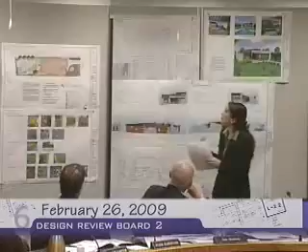As I indicated earlier, the project entails, in addition to the 1-story single-family house, taking part of the existing front house—195 square feet of it—and converting it to a garage, adding a new portion in front to have the garage located in the front. That new portion will be 293 square feet.

293 plus the 195 square feet gives you the total of the new garage, 488 square feet total. Now, as it relates to the addition of the actual habitable floor space, I'll break it down referring to my staff report. The addition of 849 square feet includes the construction of 754 square feet along the north side of the house, right in this area.

They're also constructing 95 square feet at the south side, and as I indicated earlier, they are proposing a small 83 square foot accessory building behind it. It's attached with a trellis, and attached to the trellis at the other end, closer to the north side, is an accessory structure—a bar slash little wet pool area next to the pool, like a barbecue, an open space. They also have the existing pool, which they are proposing to remodel.

I have put up the landscape plan because they are proposing to completely redo the landscape. One of the most distinctive features relating to the landscaping of this site is the oak tree located in the front yard, which is proposed to be preserved. It's a multi-trunk oak tree with a very large canopy, and our urban forestry staff has reviewed the project and is working with the applicant to make sure all mitigation measures are addressed during construction.

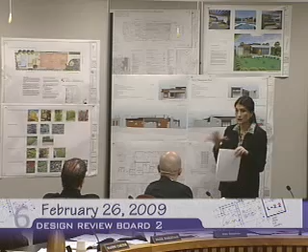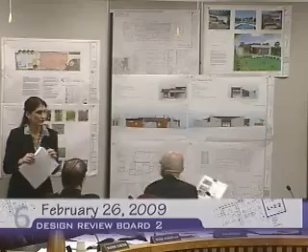I also wanted to note that the project does comply so far with all of the zoning requirements. Now I'd like to jump into the design. As you can tell by the photos, the existing house has a certain style, which is completely being changed and redesigned to a more modern style home. I go into detail in the report as to the types of materials they are proposing, which is consistent with this contemporary architecture. Are there any questions regarding any sections in the report before I jump to the staff analysis? Nope.

Staff recommends that the board approve the project as proposed because it is compatible with the design guidelines and the overall neighborhood context. Staff also recommends considering permeable paving, or a California driveway, for the new driveway rather than concrete.

I would like to mention, which I did not include in the staff report, that in the R1R zone, when you construct a new driveway, decorative paving is a requirement. Due to that, the applicant will not just be able to use a plain concrete driveway—it has to be decorative. I did not mention that in the report, but I addressed it earlier with the property owner, and he'll most likely bring that up as part of his presentation, and perhaps discuss with the board a different type of material for the driveway.

Regarding site planning, the proposed site planning, landscaping, and parking appear consistent with the majority of homes in the neighborhood and the design guidelines. The existing site plan conditions will be maintained and are therefore consistent with the general neighborhood pattern, and the addition is not inappropriate for the site and neighborhood. Regarding mass and scale, the overall mass and scale of the building will not significantly change. As previously indicated, minor changes to the front setback, overall height, and floor area will take place, and the addition is not out of context in relation to the general neighborhood.

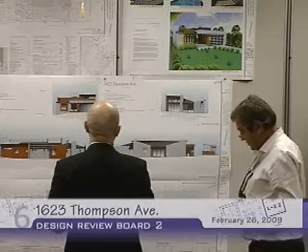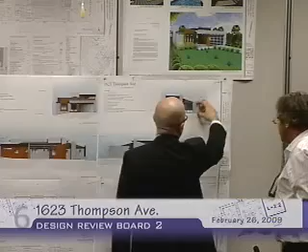A couple of questions, trying to understand the usage of the material, what you were trying to emphasize, and why you have different conditions for the same type of application. For example, over here you have this slanted plastered wall. You're extending the wall up, and you have this very interesting detail, with the glass going up to the roof framing. You have the same condition here, and you brought the glass up to the frame. Why didn't this happen over here, so that you'd have the same kind of element there, and the same detail used?

Was there a specific reason, or is it because this house represents spaces which are different in usage—one is a dining room, the other a bathroom—and formally applying similar treatment to different spaces with different functions feels a little mechanical? Our goal was to have something aesthetically composed.

For example, you have windows in a closet. Within the same closet, you have one larger glass and one smaller glass that doesn't match any of the lines. This top is matching this line, but then this didn't come down to even match this or this.

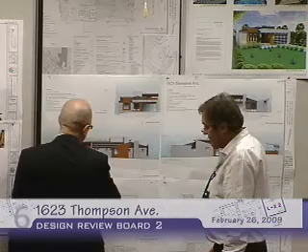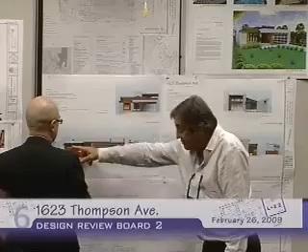So this is within the same space, same closet, and it's a composition to us. We didn't try to have monotonic repetition. We tried to have some kind of more contemporary, aesthetically composed plan and elevation, etc.

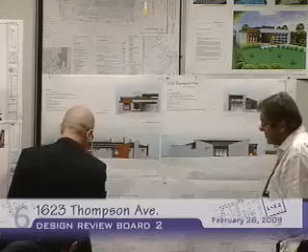And then like for example, the other spaces that I was looking at, you have on the plan this pop out, and then you have this. I'm assuming you're trying to accentuate this wall that you've created that extends beyond, so you plaster that, but you created this very heavy, very dominant piece of element there. And then it comes through similar to this, but then it actually wraps around and creates this off-center window system that your window goes against, and then you have this wood that comes in there. So again, do you understand what I'm saying?

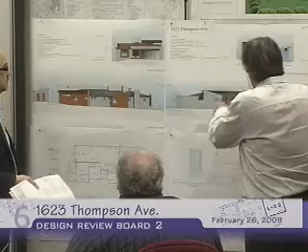But we purposely didn't want to apply the same element everywhere. So we're looking more like composition, the whole picture. And I think it could get more unique, a little more. It's just my personal opinion. I appreciate that, I understand what exactly you're trying to point out. I just wanted to get your opinion on what your thoughts are.

So this is the material you're using, which can substitute the wood. Right, it's TRESPA, it's 1 hour rated, but somehow it hasn't been approved by the local fire department.

And we are in process to do some paperwork so that they can approve it. Thank you.

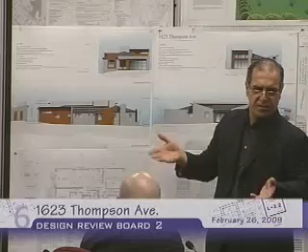I think this corner—the way the rest of the building works is that you've basically provided a new face to the existing house, and then the roof picks up and you see the roof. There's no way to cover the roof, but this corner sort of becomes weaker because there's an element. This system of wall stops, then you see part of the eave, and then this piece kind of stands up and goes around.

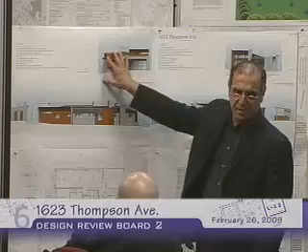So it loses its strength in providing sort of a wall that completely reintroduces the elevations in a new way. This corner kind of doesn't know whether it's the old existing building or the new building. That's the part that really jumps out the most. But I think the rest of the detailing is very hard to pinpoint which way is the right way.

So from my perspective, that's kind of a matter of choice, but I think the overall building looks pretty good. So I would just think that corner needs to be brought up to the rest of the building's appearance.

If I go next, I concur with my colleague. As I'm doing my drive-by on this—anybody that goes in, this oak tree is substantial. It is a part of the family. I'm sure everything from your sewer main line, anything in your house, goes through this oak tree. So I'm delighted that it's in good health and it's going to be maintained.

My earlier questions about modern architecture were just that—many people will redesign their kitchen and go modern, but it's another step to do the front facade in a modern tone. This does remind me that when you go modern, attention to massing and scale becomes a little more of a talking point than not.

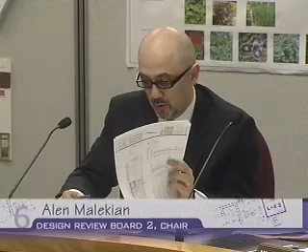Good, thank you. Well, I do agree with my colleagues, and as I said before, I really appreciate modern architecture, and I'm glad to see this project. My concern, being that it's very close to my heart, I look at it very carefully, and unfortunately I have a lot of opinions, but I have to hold back. I would like to give some suggestions and some things that may have been seen by my colleagues, but may not be an issue. I would like to bring that up, and I would hope that you would consider addressing these issues. They're not life or death for me to deny the project or return it for redesign, but I would like to state some of the findings that I did, and show you some things that may have been an oversight on your part also.

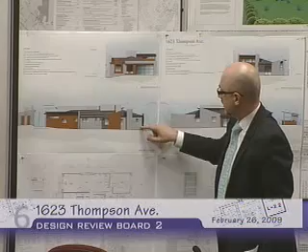Going to the front, this particular element that was added, I feel if you decide to keep this - and I personally don't mind it, I think it's really an interesting contrast between the elements - but as you come around, the way that it's been done, just attached to the side, I would carry this to make it look like a volume rather than an attachment, make it part of the building. Rather than removing it, I would just take this and make that to be, just... Well, we can't have a dialogue, so I'm just saying this.

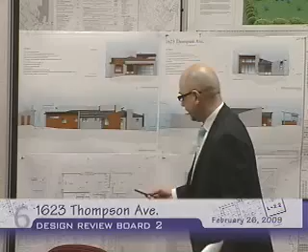Going around, this is interesting because this is the only place you used siding instead of plaster. But when you look at the plan, this siding and the plaster are at the same line. So, to me, how do you tie that together? How does the siding come to the plaster? All of these details - you've gone to the extent of adding some elements that kind of block this and close it off, rather than having this straight line come through. So I think, if it's possible, and I don't know if it's even allowed or not, I would either square this off and carry it over, or pop this out if it's allowed, maybe give it a thickness, or somehow make this an element.

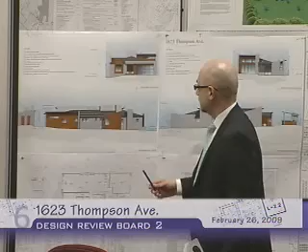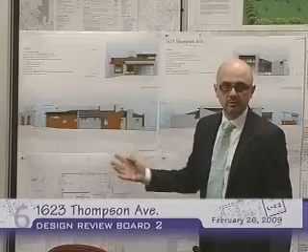And the reason this brought itself to my attention is the way that the window comes to the line, whereas on this side it just creates this uneven balance. I know this is a leftover from the original building, but going through this whole redefinition of the entire architecture and keeping this bay window element, I think it's a great opportunity to square it off and create a corner where the glass goes around - this whole thing becomes solid glass or something, and you can pick a detail to address that. This really doesn't make sense to me. It's not an element that should remain.

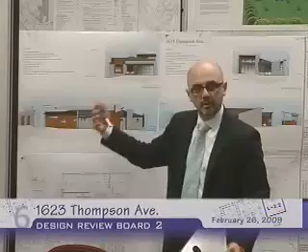Again, going to the windows, I think it would be a lot more powerful architecture rather than look like a mistake, if they were within the same room, within the same plane - they should be consistent. I think either you create a glass and carry it, cut this out, maybe do a metal panel - maybe the narrow one, this end is glass, and then metal panel siding comes to it, still have a wall, so that element plays with this. Or you have this linear line, maybe create a long linear element there, and that becomes its own thing. So I think it's a great opportunity to come up with something new.

Coming around, I think this is one of the most powerful details you have around the house, and I think it's a shame that it's just been used only in the bathroom. I think there's definitely an opportunity to use this on a much larger scale.

I think if you cut this out and carry the rafter around, just like the detail you've done, having the window—there's essentially no openable windows within that living space. None of these windows open up. This is a fixed window, these are sliding doors, so every time you want to bring fresh air in, with everything and the high ceiling, there's no actual window with a screen that you can open up. This doesn't look like an openable window.

If it is, then I would probably use the same kind of element here. That's what I would do.

Overall, I think it's a great project. Again, I would emphasize this also—maybe this detail is the same detail as you have here, maybe it comes around, and then this wood siding comes around, so you have this element occurring in the front as it is in the back. To me, it's just that something used once makes it powerful, but if the same condition is used in many different ways within this very small vicinity, it becomes unthought of and doesn't become powerful enough.

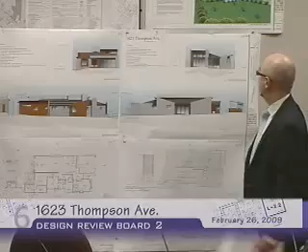So I think this needs to be worked out, having the glass coming all the way against the plaster, whereas you have siding to that. One other thing—I'm nitpicking, but...

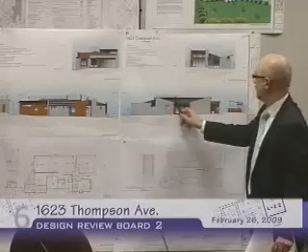This volume that comes in dies into a smaller volume, and you have a different line here, but as you come around it becomes one element that kind of jogs around. I think the way it's detailed, maybe this massing on this side is heavier, and this line carries across, so somehow these volumes kind of carry over to each other. Overall I do like it, but I think fine-tuning and coordinating these details together would make it a lot more powerful.

One ironic thing—having this giant oak tree in front, your rendering has completely managed to eliminate this oak tree. So I think with the rendering showing the oak tree, you would see a completely different building.

As far as the site plan, I appreciate the site plan. I think the landscaping is exceptional, but I think the driveway needs work, being that it's a new driveway for a new garage. If possible, I would use a more rectangular, more modern approach to simply pouring the concrete. There are ways to do it—if you pour 6-inch concrete, I'd probably use larger scoring, maybe a 6-inch band at a scale of 24 by 6 foot or 24 by 8 foot panels, with a 6-inch band and maybe embedded river rock to create patterns, if you don't want an impermeable surface. But it definitely needs work.

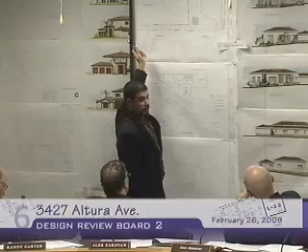When we first saw the project, this was proposed to come up with a solution to be able to, as you back out of the garage, turn around instead of backing out throughout the whole 210 feet stretch. So this is a geoblock grass, which I personally am not too familiar with, but the architect or the applicant is here, and he can touch on that if you want him to.

The massing of the house is that the shape of the proposed addition is sort of irregular in shape and has a lot of plane variations and turns and corners to create a more interesting facade.

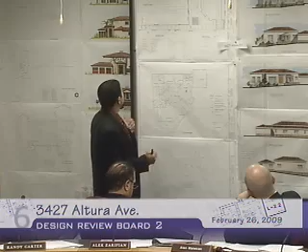There's an existing gate here which is less than 5 feet and it's operated manually, so it did not require a permit when it was put up. I have found old permits that show the construction of the existing house and the additions in between, so I think I have pretty much touched on the things I wanted to.

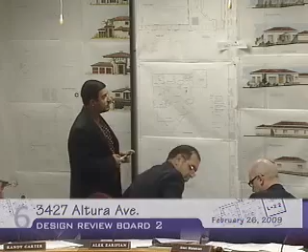If you have questions for me, I'm available, and the applicant is in the audience as well. Does the staff recommend approval?

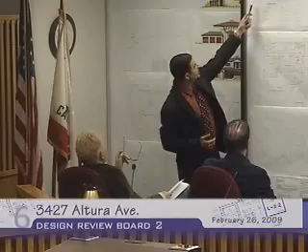Yes. I just have one question - this is me going to school again. This 210-foot driveway, where are you measuring, all the way up? Well, it's a rough estimation from what we were presented, basically from the street or sidewalk to the garage door. It's approximately that much, up to what I guess would be the north lot line there.

How many square feet is it? This lot is 10,000, about 10,200. How much of that is the driveway? Well, it's about 10 by 134, so about 13 to 1,500. Okay, thank you.

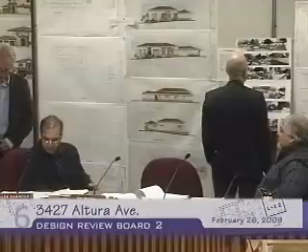That's hard to say from the photo, 8 feet away. Hard to tell. Oh, it's this corner, there. Yeah, it's 16, it'll basically be probably 16 foot straight up. I wonder about the impact on the neighbor's side.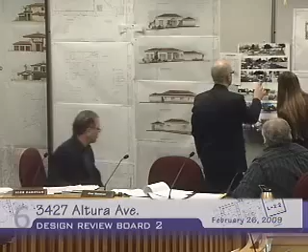It would be this neighbor here, right here. You'd have a 16-foot wall on that side. It looks like the setback's about 8 feet.

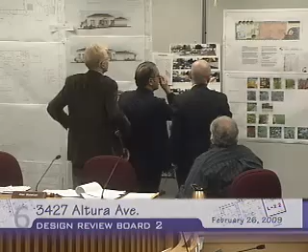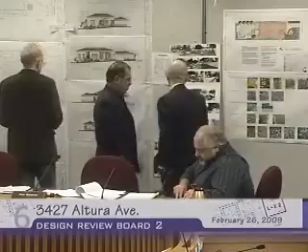This is where the addition is, and the closest place.

The first part of that is about 6 feet away, that first piece. So at that point, you'd have a 16-foot wall 6 feet away, straight up.

Which is essentially that west elevation, yeah. We're talking about this much difference in reality, like a 4 foot difference. Doesn't seem to me it will have too big of an impact.

Let's say this roof was here. I think that kind of difference is really what we're talking about, right? Is it really that kind of grade change?

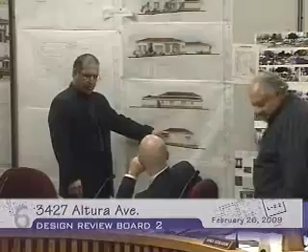Looks like it's pretty flat right through here, isn't it? Yeah, there's probably some gentle slope there. But I was just thinking if this roof, for example, was down here and went straight across, I don't know if that would have an impact you'd worry about. I just wanted to make sure we looked at it. That was really the only issue I had, massing for the neighbor.

All right, so far I have two okay with the wall conditions and heights, everyone? I'll make a motion with whatever we said. So a motion to approve with two conditions brought up, we want Mr. Malikian to follow the recommendations.

On the windows, if the board feels strongly about it, I could go either way. I don't think it's as critical that far back, but if you guys think it's an issue. I think if there's one house in Glendale that can use vinyl, then everybody can -- yeah, this would be the one you could use it. I don't know how the rest of the board feels, but I think we can approve.

As presented, and that would be my motion, with those as considerations instead of conditions. Yeah, you can make it a consideration. So we have two considerations: to use fiberglass windows, and true stone veneer instead of cultured stone veneer.

Consideration, consideration. And I have a motion made by Mr. Giragos. Is there a second? I'll second that. Okay, this will be a roll call.

Mr. Carter? Yes. Mr. Giragos? Yes. Mr. Zarifian? Yes. Chairman Malikian? No. Okay, motion passes 3-1.

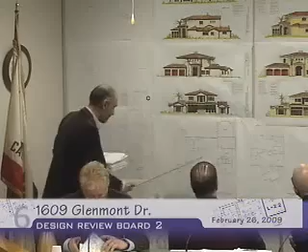You want to come up? Yeah, sure. All right, so the addition is basically from here to here in the middle of the house, right directly above this volume, which was just the living room and dining room. The reason we decided to do it there is so that we don't have to tear down — this is a very expensive kitchen, and on this side a master bath. So we want to stay away from these two areas, and that's why we left the roof.

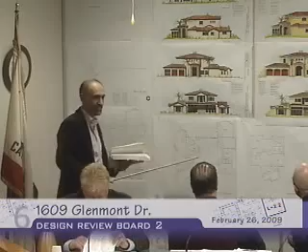Initially, last time, actually, that's what started the comment and the return for redesign — because we had said it's a Mediterranean style, the board felt like it was not consistent with the Mediterranean style to have the gables. So I've tried to go away from that.

The what? So sorry, I wasn't here. So let me ask you this: are you happy with your new design? Oh, I'm happy with it. Which one were you — I think the owner prefers the original one, but it's essentially the same thing except for the elimination of the details.

And the reason — I'll say it again — these elevations that we're looking at, the only way you'll see it is if you're in a helicopter. There's no way you're going to see all these windows.

Are you proposing to replace the existing windows? No, all wood — the existing house has wood windows, and we're going to match the wood windows. From the photos, it seemed like they're white. Yes, they're white, we're going to match that.

Would you be open to staining the windows? I mean, I don't know, I just think it would look better as stained windows. No problem.

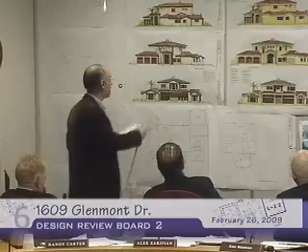What is this around the — Originally it was supposed to be precast, but again, going away from the Mediterranean style, I went with something really simple, and we could even eliminate it altogether if that's what the board feels. I don't have a problem with eliminating the surrounds or even getting rid of the stone. But the roofs — it's something I can't really do anything about, because if you ask him to change the roofs on each side, it's like asking him to demolish the house and build a brand new house. Why do an addition instead of a new house?

Okay, do we have any more questions for Franco? No, thank you. Okay, public session is closed.

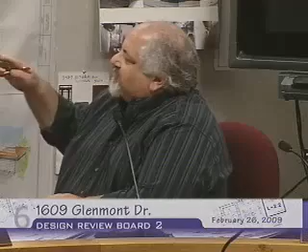For me, on the old design, what was unfortunate is that it's really two different buildings separated by the floors, and I think there's nothing wrong with either, it's just inconsistent. What I said last time was that you could do something on the lower floor by adding a pony wall and some additional roof that would make the lower floor more consistent with the second floor. That was one option I was talking about at the time.

I just think it's totally inconsistent in my mind, so in my mind, I like that it's at least getting more consistent. Without doing that formal a design, I think you can have dissimilarity on the first floor without it being so dramatic. The banding at the top and the massing is so strong that when you look at the first floor with all its variation and interest, it seems completely inconsistent. So from that standpoint, I think the style change helps so that it isn't so dissimilar.

I actually was going to ask Franco if there's really not going to be columns in the porch in the back. There's not? That will be a steel beam. Really? Okay, that's fine. I just have a quick question. Yeah, that was where I was at in the comments I made at the time.

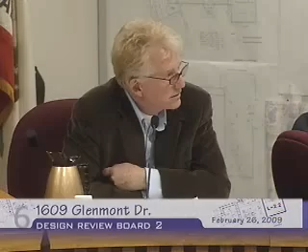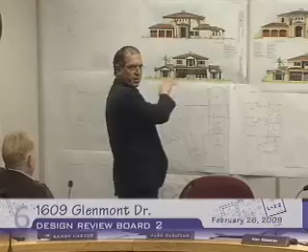In both cases, I have a question. These windows kind of look different. So these are new windows, and it seems like you've tried to make them similar on this side, but then why is one so much bigger and kind of so close? That's the old design. Yeah, I know. But—

Can you talk about the windows? One is in the master bedroom, and I'm trying to give him as much view as possible. The other one is in the master bath, by the tub, so it's not as important to have more glass there. I'm trying to keep the amount of glass to a minimum, yet still give him the view. That's really why they're different.

But even from his own backyard, it would be difficult to see that elevation because he can only step away 25 feet or so. I mean, I guess you'll still see the windows, but the impact is different. Yeah, as I said in the previous case, the argument that just because we don't see it then it doesn't matter — I don't agree with that, but I see your point. I don't have any other questions, actually.

I like the new design better. It's very short and concise. I think it's an improvement to the previous one, and somehow the house looks much more together and stronger overall, an improvement to become a new house. From my point of view, things work better and the house comes together better. That's my recommendation. Regarding staff's comment about the entry porch height, it seems that it can lose just a little bit of height — in the whole proportion of the house, it's almost like just a bit higher than it wants to be.

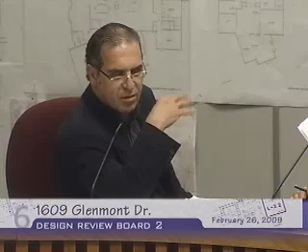It doesn't give enough room above that for those windows to even have anything to say. So I would kind of agree, but not too much. But you need to consider it, look at it some more. Maybe somewhere in a couple of feet you have to draw it and see what becomes more balanced. It just seems like it's too heroic, too big, kind of.

Generally, that's all I have. I don't see anything wrong with the design. I think it's a very nicely designed house.

The porch might look a bit strange given the style of the house. You'll never find an opening that wide. So I would think, to be consistent with the design, you would want to see something, because the steel girder wasn't created at the time that this style was.

As a suggestion, the windows that have transoms on top, I don't think it bothers me. Actually, the ones at the ground floor, you might consider using higher windows that include a transom in it, so it really opens up the interior space.

I think you'd find that these windows are too small, although there's a door and window above, but somehow it wouldn't give the total dimension that you would need. So I would make the door larger.

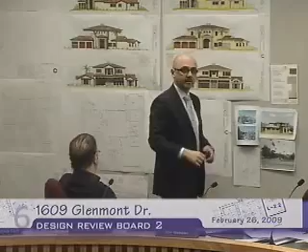Assuming this being the same color, this would have been stone, and the stone carrying around with the details coming around, I think I would have suggested that the difference between this top addition and the bottom addition, same thing with this, is the variation of the plate heights, the overhangs. To me, comparing these two, they're still the same.

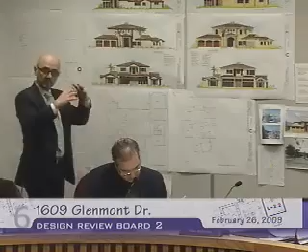So personally, I don't think so, except this point right here. I think I would have suggested that certain areas you would play with the plate height, areas where the height is not really necessary, such as the bathrooms, and kind of break up the roof and create some elements there, and bring the same playfulness of the rafters and the plate heights up at this addition.

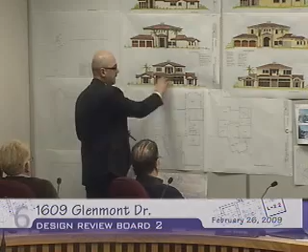I agree. I think the opening is huge compared to it, it doesn't feel proportioned. Back here, just two slender columns still, to me, I would have said it was unproportioned, and over here it's just completely eliminated. There may be possibilities, maybe adding a band or column or trellis or something, pulling back, bringing more light in.

But overall, if my colleagues are happy with this, I'll go with that. But personally, I think there's a lot more interesting stuff happening there that we could have asked them to carry these details around and bring that architecture, that detailing, back onto and start working with that.

But if that's the direction -- We did ask him to do that. You did? That's what you're saying. He didn't want to rebuild the lower sections. It wasn't rebuilding, it was just if they were going ahead and putting elements around the windows -- I'm not sure if you were proposing to do that originally. So I would have said, let's carry it around and bring those details around.

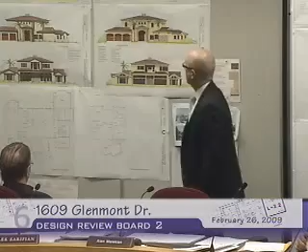But I think these windows, like small little details like this, are a lot more interesting than just blank solid walls. But I noticed that those windows have been eliminated. Can you bring those windows back? It seems like those walls could use some windows. I noticed the same thing.

I think they're bedrooms, so you end up having just an office and... one other suggestion: you have a bathroom next to the vestibule on the right. That bathroom needs a door, so don't forget to put in the door. Don't build a bathroom without one.

Friendly suggestion. So.

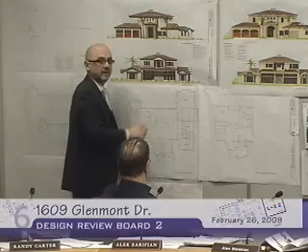So being proactive about the situation, you may want to add a beam here, maybe a 24-inch beam, and then create these elements, and carry those down with some columns or something. I don't know, these are just thoughts.

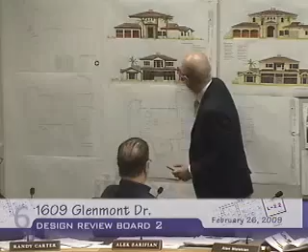But I think this slenderness versus the span is what the problem is. I think you've lost some. Because by the time your structural engineer works on it, that thing's going to be about 30 inches, I guarantee you. And so those windows are going to be pretty much gone, unless you put columns there, and then your 12-inch would work.

So we see the applicant nodding, and it seems like the board feels strongly about this one. Just to remind you, if it's a consideration, and the plan check set has exactly the same design, staff would stamp them as approved. So if there are any of these conditions or considerations that you feel strongly about...

I think that the patio area, by the time they're done with their structural engineering, they're going to end up having some sort of structural modification there. So I think I would want to give them the allowance to come up with a design, maybe adding columns or a beam, some configuration, and I don't know how you would address that.

I don't want to put it as a... No, I think the columns should be a condition, not a consideration. Is that what we're hearing?

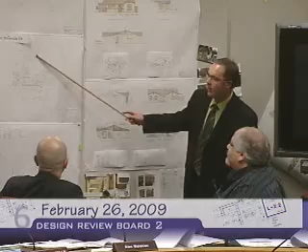Let me go over what's on the board. This is the site plan. Riverside Drive is along here, the existing residence is here, and the proposed additions will be here and here. The carport that will be enclosed is here, and the demolition is in the rear. The roof plan is up top, floor plan on the bottom. These are the elevations, this being the front elevation along Riverside Drive, along with some photos, neighbor comparisons, and a material board.

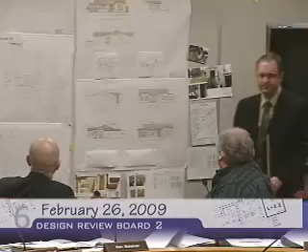The project proposes to change the architectural style of the residence from a ranch Spanish hybrid to one that's more traditionally Spanish in style. The 217 square foot addition is located both at the front and rear of the residence, with the proposed demolition in the rear. The existing carport on the front side of the house will be enclosed as part of the project.

The site planning doesn't significantly change as a result of the project. The addition to the front enables creation of an entry court, a new feature on the site. Demolition of the existing sunroom and construction of the 87 square foot addition in the rear will also create a small courtyard in the backyard.

The existing orange and sycamore trees will remain within the front yard. Camellia and flax are proposed within the court in the front yard, and they're proposing a new pepper tree also in front of the bedroom addition.

Like the site planning, mass and scale of the residence does not significantly change as a result of the project, and like the majority of homes in the area, it is modest. The front addition is consistent with the massing of the existing residence. Roof pitch and fenestration size and pattern are appropriate, and the 14-foot height of the existing house will not change.